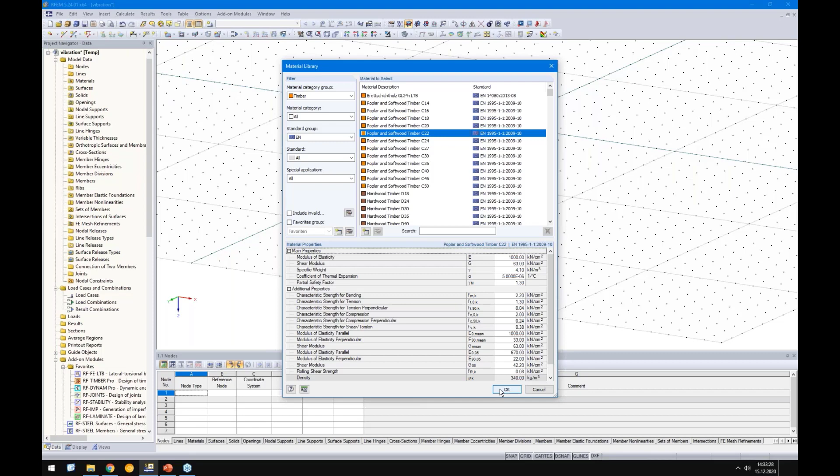Okay, so how do we do this? Let's go back to RFEM, and let's start with the timber. So I will create a new material. Watch out, they have used 10,000 Newton per square millimeter, not 11,000 as C24, but in this case we can simply use a C22, which should have 10,000 Newton per square millimeter. Then I click OK, and the height of the timber is 200 millimeter and the concrete is 100 millimeter. So I will enter 200 millimeter, and of course that's still an orthotropic surface. Otherwise I will get an error message during the analysis.

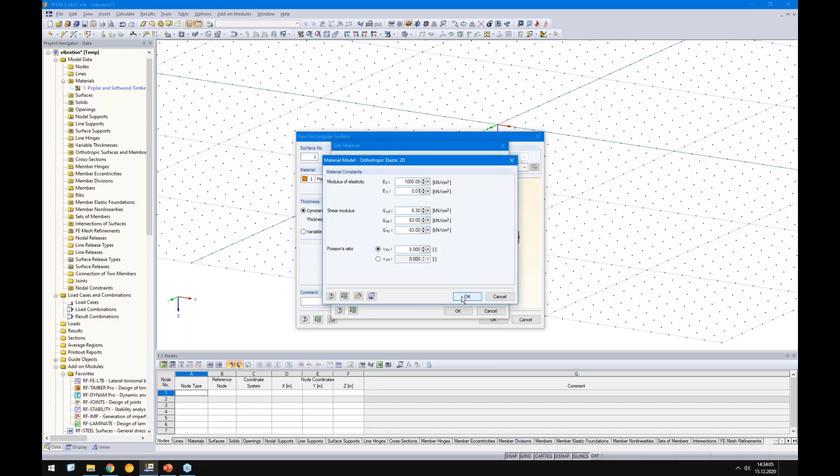And you see here we have the X direction with a strong E modulus and the weak one in Y direction. In this example we can directly set it to 0 because in the hand calculation from the source, no stiffness was considered from timber. There's a tiny stiffness, but of course not much. All right, so it's an orthotropic surface with 200 millimeter. So it has 8 by 12 meters. Let's double check, 12 meters and 8 meters.

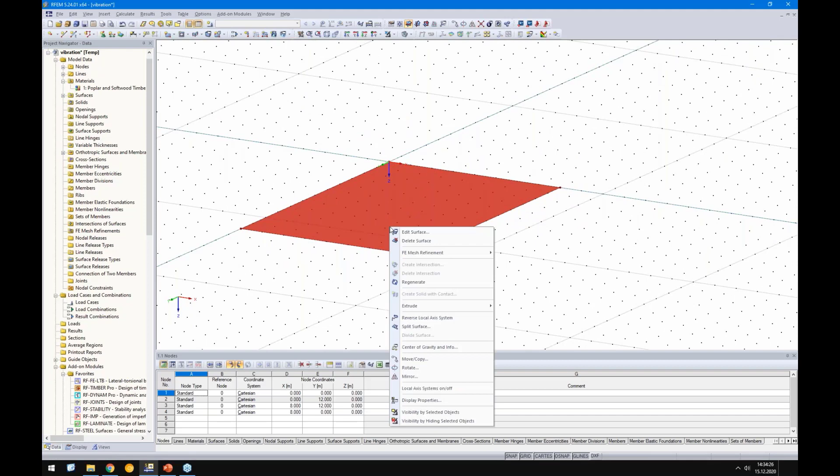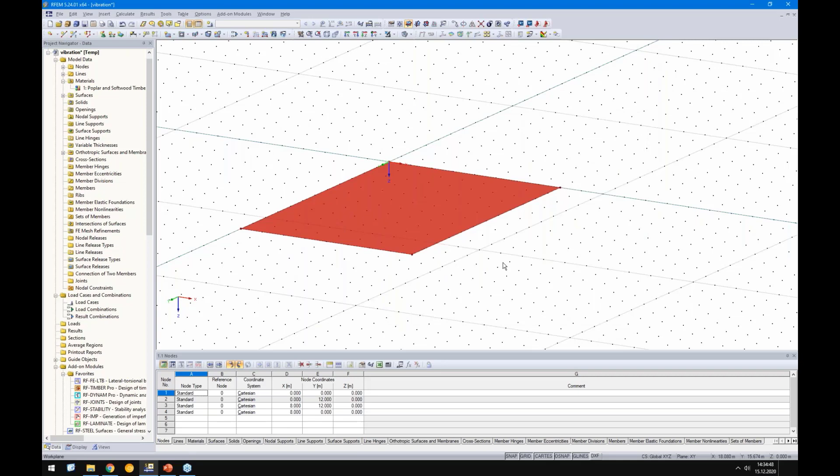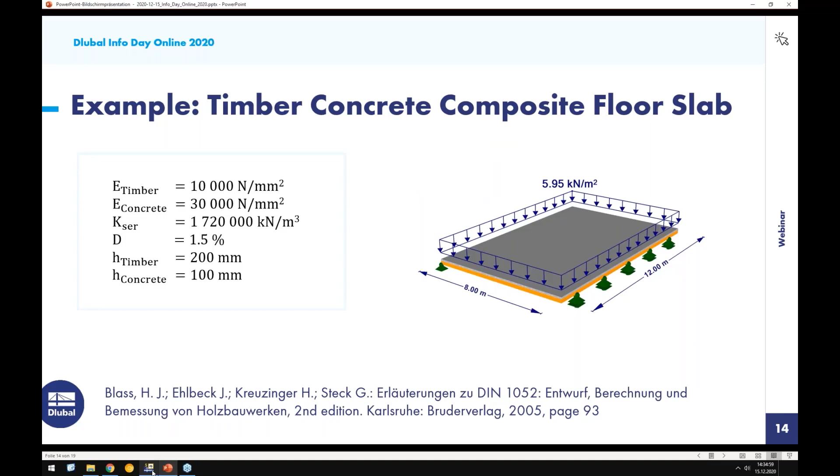Okay, then I will copy this surface and I will create a concrete. So the thickness was 20 centimeters and 10 centimeters, which means we need to lift up this concrete surface by 0.15 from center to center. So we need a new material here. Let's check. They have used 30,000 Newton per square millimeter. So we should use a concrete with about 30,000. It's a C20/25. But it has only 100 millimeter, of course. So we will switch this to 100 millimeter.

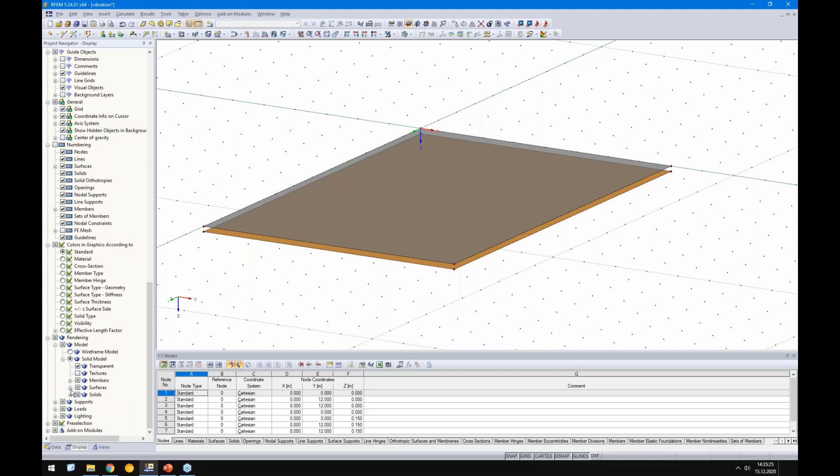And afterwards, let's check if everything is correct. We activate the thickness for the surfaces. And when we zoom in, we see directly, this is the concrete from here till here, and from here till here, the timber, which looks fine. So what we need to do now is connect the concrete slab with the timber slab. And what possibilities we have, I will show on two examples. So we have two ways to do this.

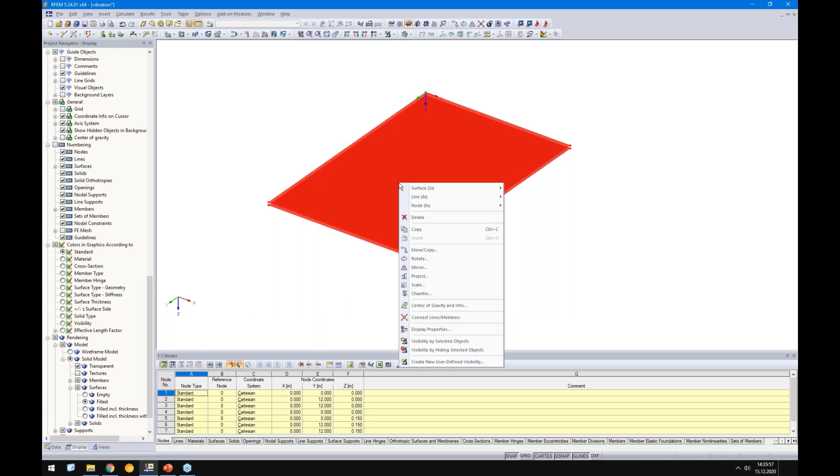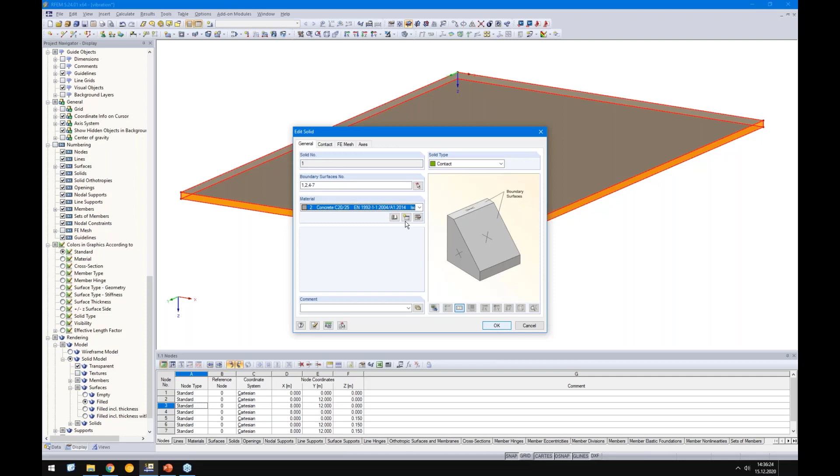The first way, I start with a contact solid. So I select these two surfaces and say create solid with contact. You see directly we get some boundary surfaces. These boundary surfaces have zero stiffness because they get the stiffness from the contact solid. We will define this contact solid. And we select the contact. So these are the contact surfaces, surface 1 and surface 2.

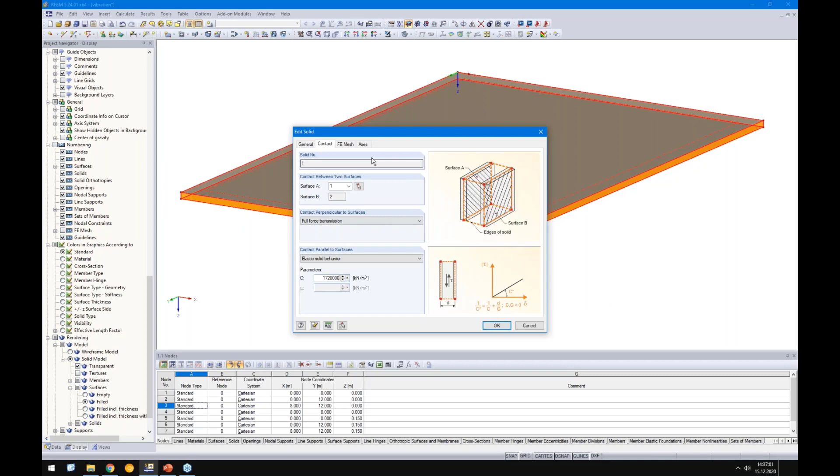Perpendicular to the surface, we want to consider full force transmission, and here parallel to the layers, we want to consider this elastic behavior, and the spring was 1720 meganewton per cubic meter, and this value we will enter here. We are in kilonewton, so I will add 3 zeros. Okay, that's it so far. Let's double check. On top we have this concrete, maybe better to select standard here. And on the bottom side, we should have this timber. Okay, good so far?

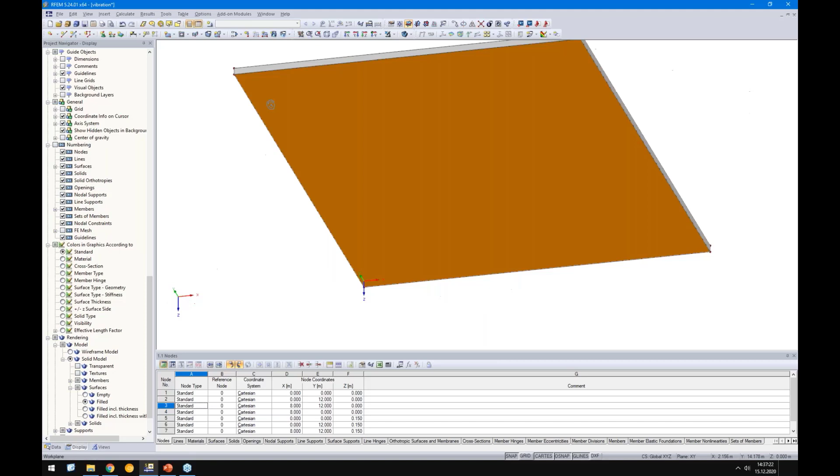Yeah, okay. We will support the slab. Okay, it's simply supported on this side and on this side. In X direction, I will also consider a tiny spring to keep it stable. Otherwise, there is no support in XY plane, and with the springs, I fix this structure, but since we do not use any load in XY plane, we'll use only the mass in Z direction, perpendicular to the surfaces.

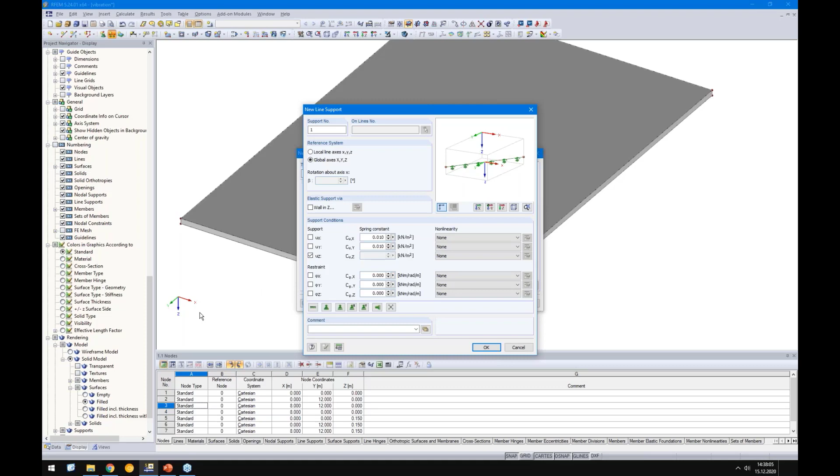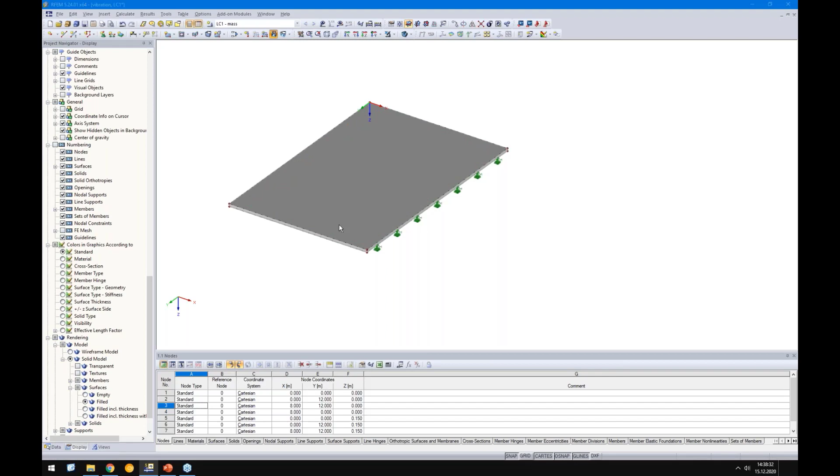Okay. So this line and this line. Okay, I will add a load case. So load case 1, that should be the mass. The self-weight is already included in this 595 kilogram per square meters. So I define here directly the force of 5.95 kilonewton per square meters.

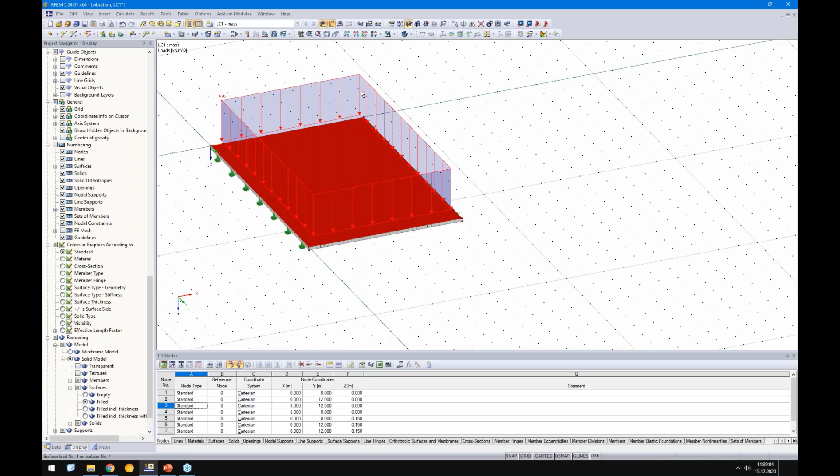And let's take care of the FE mesh size. So maybe we will switch to 0.2 meters, which should be absolutely fine for this example. All right. That's one option. I will show you the second one. For the second one, I will copy the surface via drag and drop.

And in this case, I will use the element surface releases. Okay, I will create a new one, a new surface release. I want to release another surface. So you see here, how does it work? We have one solid or one surface and another solid or another surface. And in between, there should be this hinge information or this release information.

Okay, so here you see we have an advantage because we can control both directions independently. The contact solid, there is only one direction. So X and Y is always the same value. Here we can distinguish, but to compare the results, I will use the same as for the contact solid.

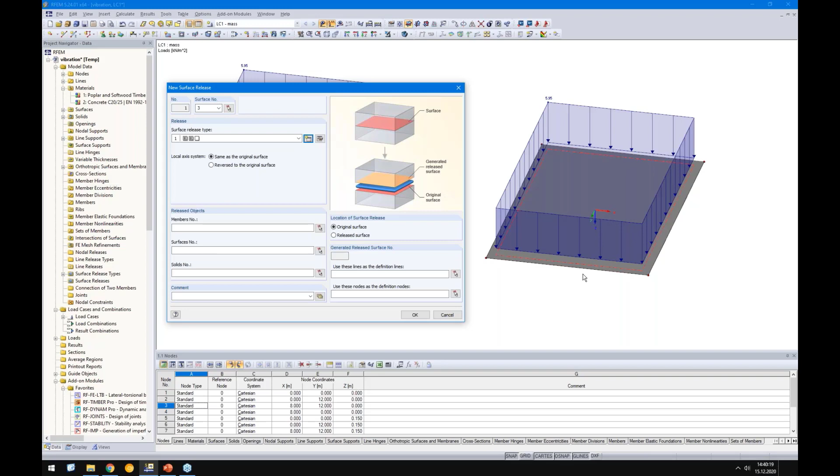Okay, good. And I can release the object here, the same what I did with the line releases, but there is no element until now what I can release, but it doesn't matter. I just click the OK button, and when I click on the surface, you see, there is already a surface. And this surface, I will add it. It's a zero surface, but no big deal.

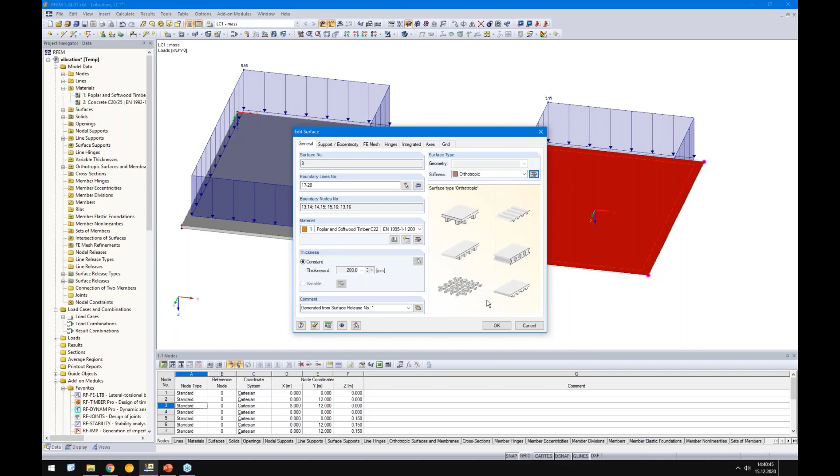I will switch over to orthotropic and I will assign this timber surface. I just need to adjust the thickness of the timber by 200 millimeter. Okay. And now I need to create an eccentricity for this concrete surface by minus 150 millimeters.

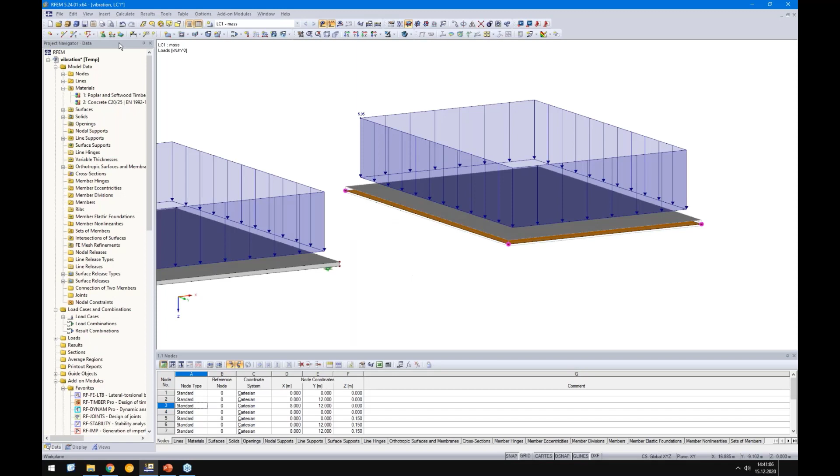Yeah, and now I have the same model. Oh, not the same, I forgot the supports. So on the left side and also on the right side. Okay, so let's run the analysis for load case 1. Meanwhile, we check what is the solution from the analytical equation. From the example, it is 9.5 millimeters.

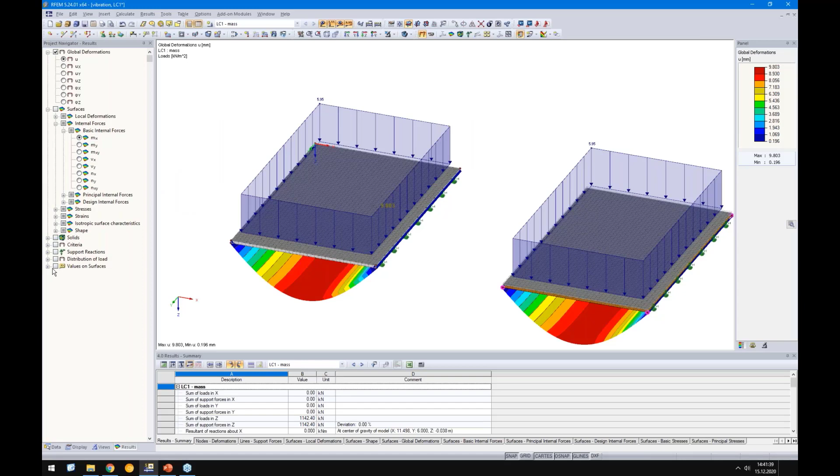Okay, let's go back and see the result. It's good, but it's still a bit away from the 9.5 millimeters. But you can see it here in the center, we have already the 9.5 millimeters, but not here on the outside. It comes because of the concrete and the Poisson effect. Of course, in the hand calculation or in the analytical equations, this Poisson effect is not considered, and therefore I will neglect it here too. I set it to 0.

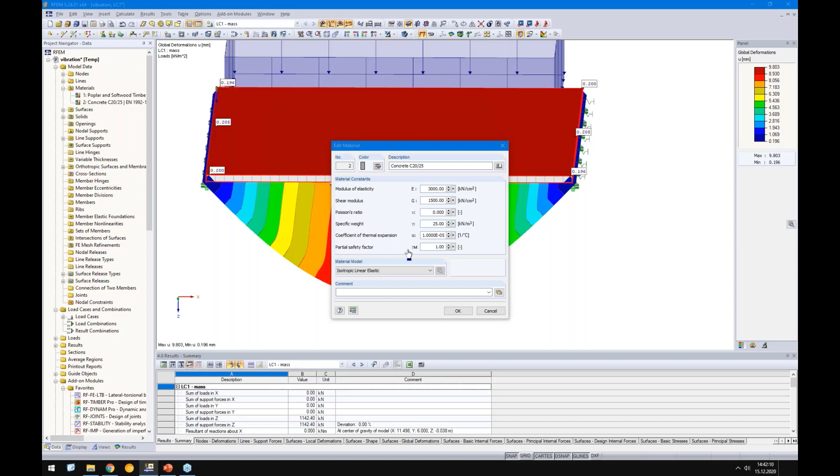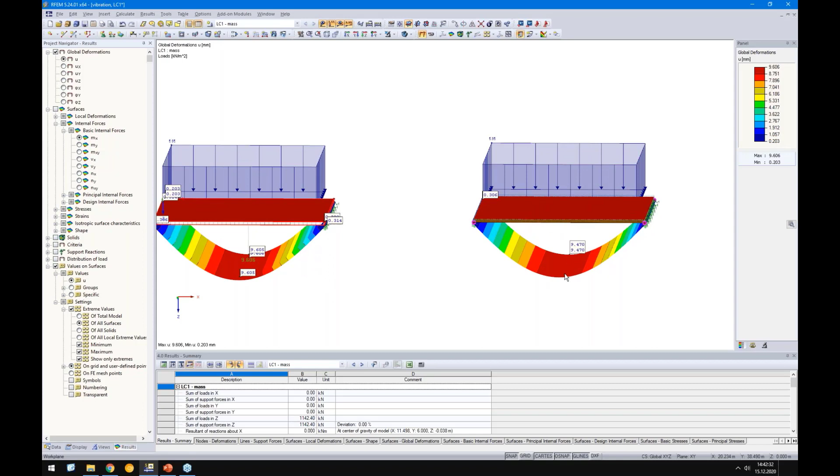Okay, then start again. So we had 9.5 millimeters. We have 9.6 now here, and we have 9.47 on the right side with the surface releases. So it fits perfectly with the result from the analytical equation.

So they write here, okay, it's bigger than 6 millimeter, and therefore the eigenfrequency of this structure is lower than 7.2 hertz. This was the limit in the old German timber code, and the new limit in the Eurocode is 8 hertz. But there is always a relation between the deformation and the eigenfrequency. So I did a small article about this issue.

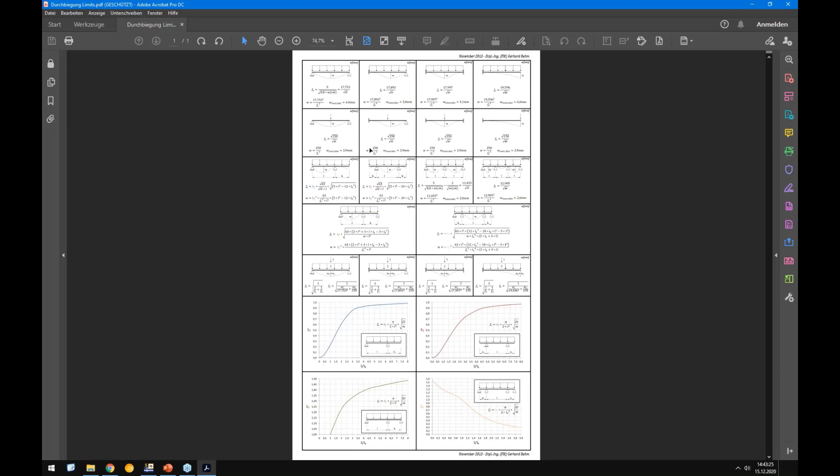It's explained here. When you go to the knowledge base on our website, you will find this information, and inside there is a PDF file that I created a few years ago, 2013 already. And here you can see the relation for a simple one-span beam. The relation is this equation, maybe this is well known from literature.

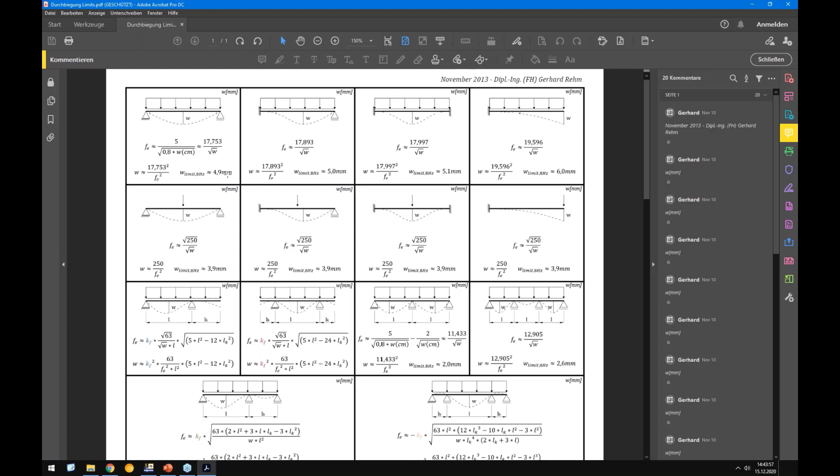So for Eurocode 5 and the limit of 8 hertz, we have around 4.9 millimeter. So if the deformation of this one-span beam is lower than 4.9 millimeter, the eigenfrequency is automatically higher than 8 hertz or 8 hertz exactly. And in case the deformation is bigger than 4.9 millimeter for a one-span beam, the eigenfrequency is smaller than 8 hertz. That's just a simplified rule. Okay, good.

Then let's go further. They prove the natural frequency. So in this case, it should be 5.87 hertz. Okay, it's really low, and they write here some additional design requirements are necessary, the same as in the Eurocode 5, but of course Eurocode 5 does not provide any information when the frequency is lower than 8 hertz. There are some literature and approaches how to deal with it, for example, from this code or from the source I mentioned, or from other literature.

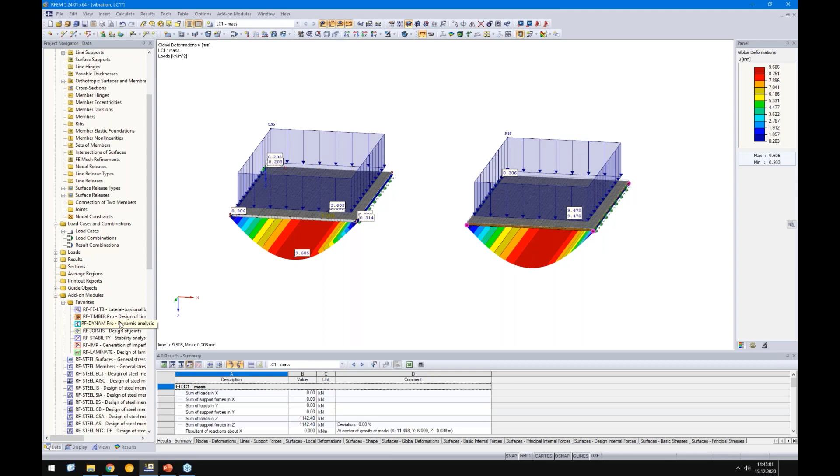Okay, so let's check the eigenfrequency, and we cannot check it directly in RFEM. We need an add-on module called RF-DYNAM Pro. This DYNAM Pro add-on module is for forced vibrations or for equivalent loads, especially for seismic design and so on. In our case, I just want to use this first sub module. There are 4 sub modules inside this global DYNAM Pro module. I use this natural vibration module, and I go here.

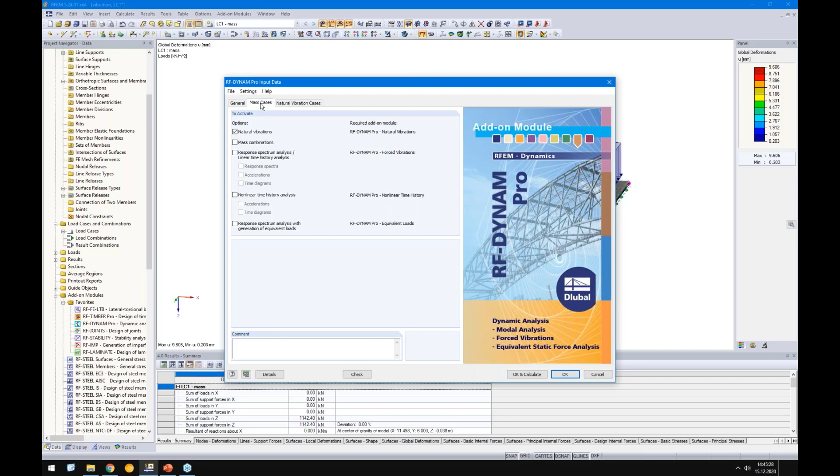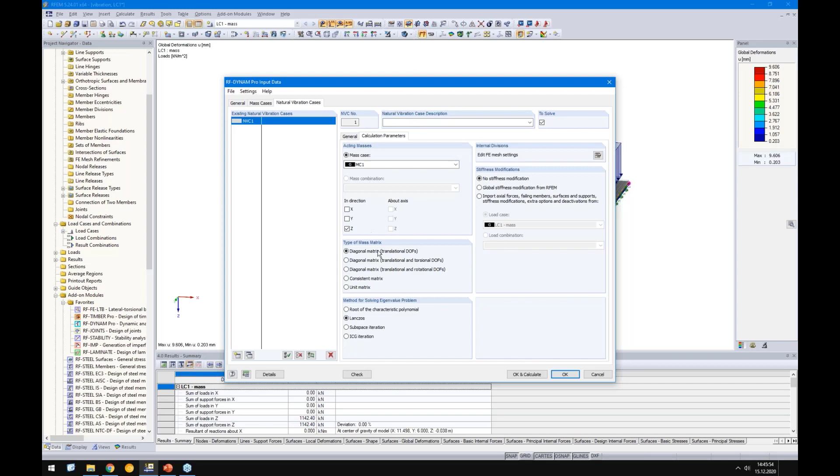I will assign my mass. So in this case, I select use the mass from load case 1. In the next tab, I can select how many eigenvalues I want to calculate. Of course, I'm mostly interested in the first one. And here I say, please do not consider the masses in X and Y direction, since I have no support here. I'm only interested in the Z direction. Okay, then let's calculate the frequency.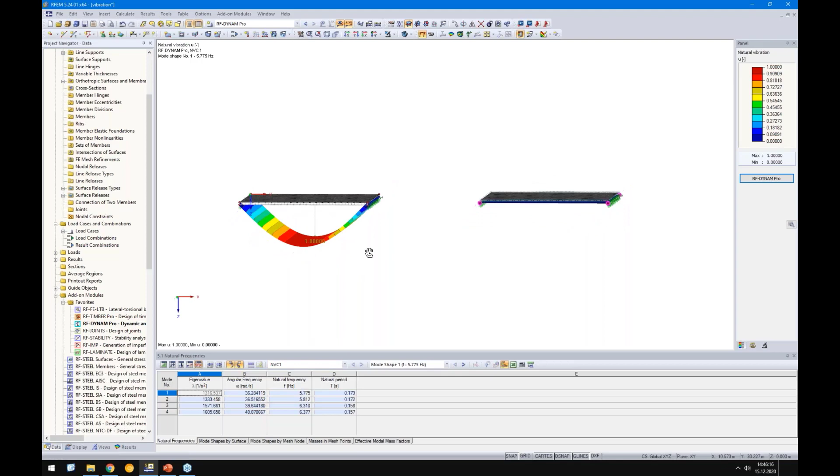Okay, you see the result here on the bottom side, and accordingly the eigenshape. Of course, for a one-span beam, I do not expect anything else. So we can check the second mode, it's on the right side, and you see here the first and second mode. The first mode is on the left side with 5.77 hertz, and on the right side with 5.8 hertz, which is fine, since the approaches of surface releases and contact solids are not exactly the same. Therefore we got different deformations, but they are close enough.

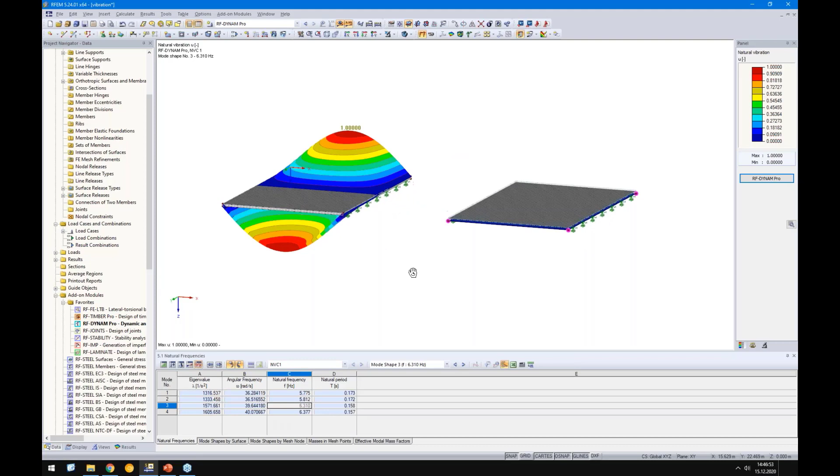For example, the third mode, that's some torsional mode, but I'm not interested in this mode now. I will check this one here. So eigenshape 5.7, let's say 5.8 hertz. And here in this literature, it's 5.87 hertz, which is fine. Then we need to check the stiffness under a man load of 1 kilonewton. It's actually the same as in Eurocode 5.

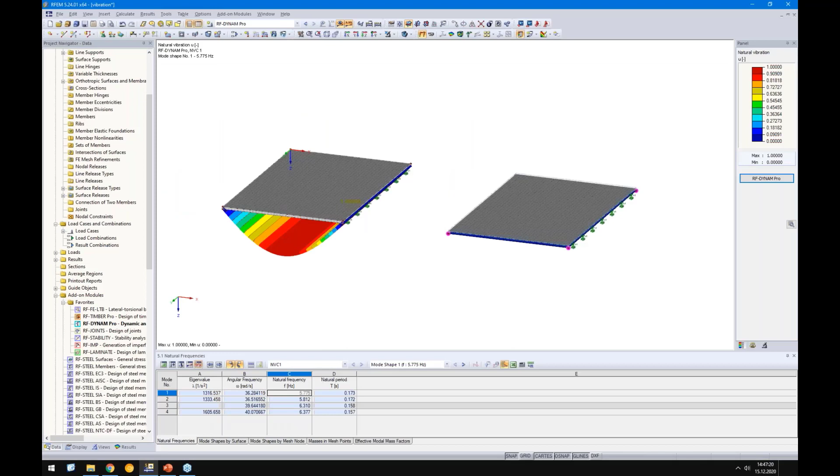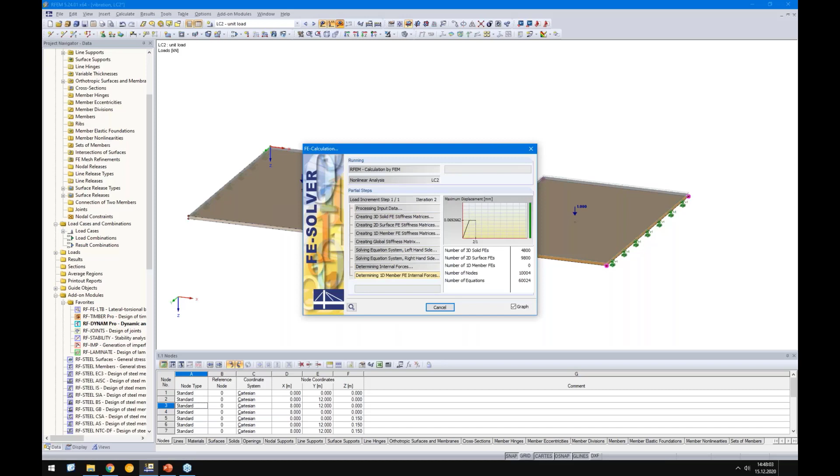We will do this. So I will create a new load case, and I call it unit load. And I will apply this load exactly in the middle. And the same here. And I add this 1 kilonewton on this generated node. All right. So we run the analysis. And we see a deformation of around 0.07 millimeters. Compared to the literature, it's a bit smaller.

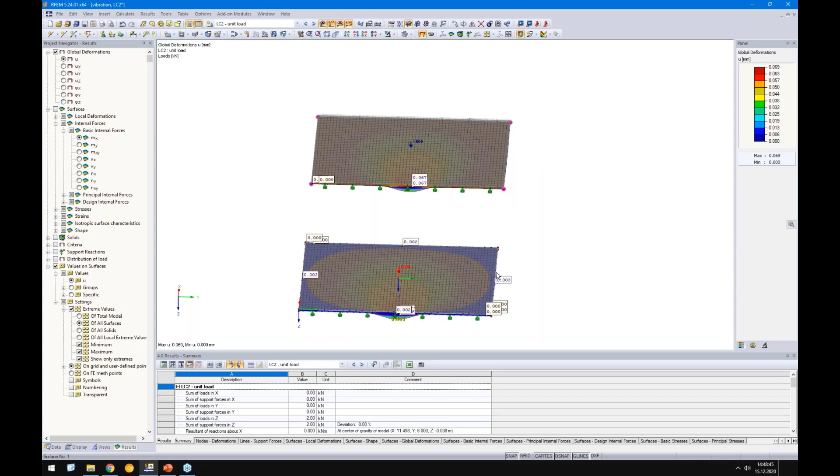The reason is because they calculate the stiffness of this floor with an effective width. They do not consider the whole width of 12 meters. The effective width was, I guess, 3.8 meters in this example. So if you would reduce the width of the floor to 3.8 meters and distribute the node load to a line load, you will get exactly the 0.083 millimeters. So in this case, it is a bit too uneconomic, but it's not far away, so it's okay.

Okay, and the next step was the acceleration design. Because our frequency is smaller than 8 hertz, we need to check the acceleration.

Empirical investigations in the 80s offered the result that vibrations with frequency lower than 8 hertz are dependent on the acceleration, and with higher than 8 hertz, they're dependent on the velocity. In this case, we are smaller than 8 hertz, so we will check the acceleration.

So there are tests showing that this velocity check, which is done in the Eurocode, actually is not really design-governing anymore, because a typical timber floor, for acoustic reasons, is already really heavy, and the weight is really high. So therefore, the velocity check is mostly never controlling and not important. But okay, the acceleration needs to be checked.

Let's check how we do it by hand calculations or by some analytical equations. Maybe you know these equations already, or you have seen them in some literature. So we have the acceleration A, and we have a force divided by some mass. So this is the force here, and this is the mass, and this 2 times D. D is the damping. This comes from the magnification function.

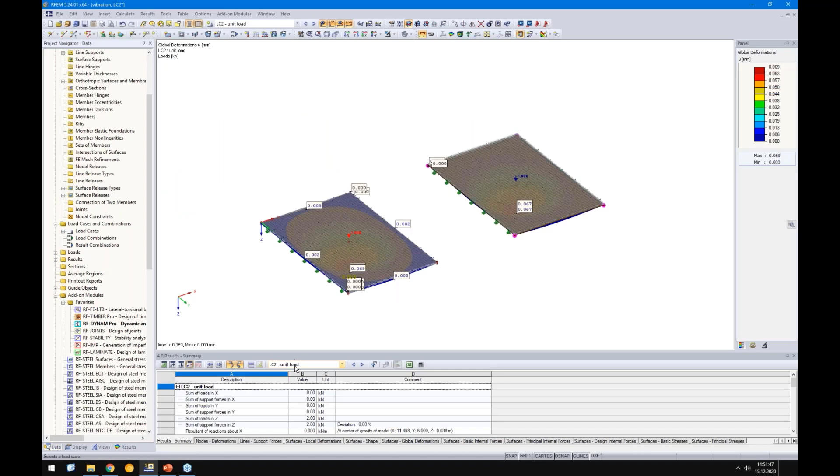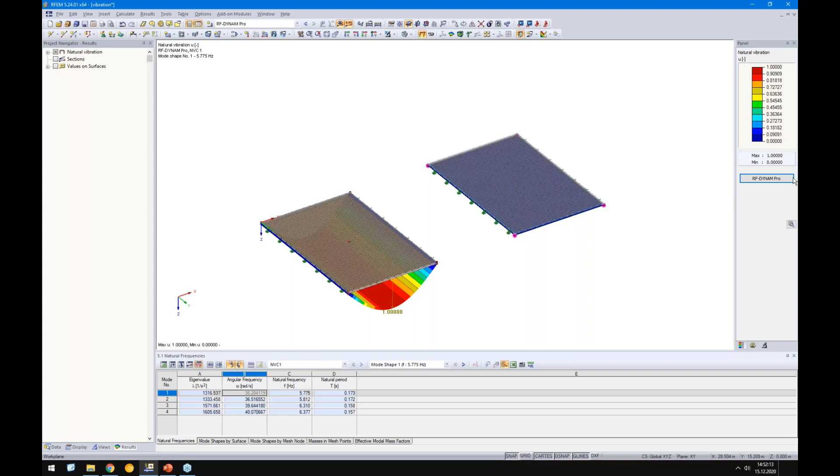All right, before we go back, maybe we can switch to RF-DYNAM Pro. No, we cannot. We need to restart the analysis again because I want to copy the natural frequency, because I need it in the module. In this case, I need the angular frequency, omega. So I copy the first one. And then let's go to RF-DYNAM Pro.

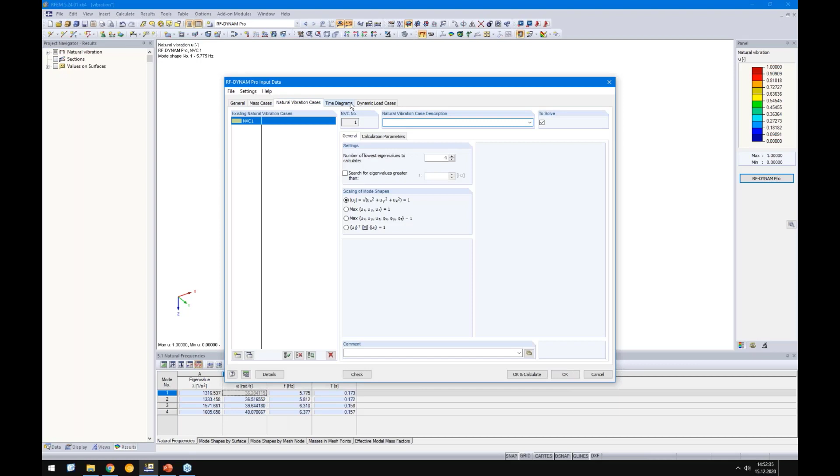So in this case, I need to activate this response spectrum analysis option, or in this case, it's actually a time history analysis with a time diagram. So I can skip the first 2 tabs because they are not important for it. And here I need to define this function, and I copied already this omega, and this omega I have to enter here. So this is actually a resonance check.

So do not enter the angular frequency of a person. When you walk around, you walk with around 2 to 2.45 hertz, and 2 times pi by the frequency is the angular frequency, but do not use the angular frequency from the person. That's why it's called resonance check: you need to enter exactly the angular frequency from the first eigenshape to get the resonance. Okay, the shift should be 0, and multiplier I write down just 1 for now, and you see this periodic function, which is fine.

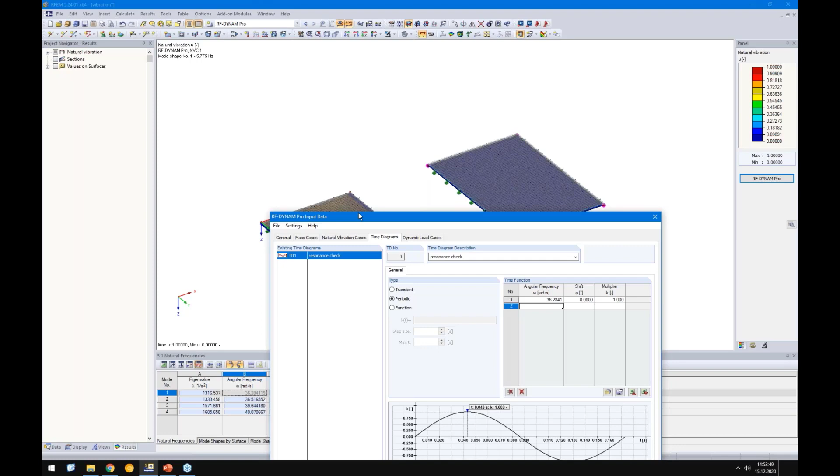But we need to consider the correct force. We remember in load case 2, I have defined this unit load of 1 kilonewton. So when we check the force here on the upper side, we have 0.1 by 700 multiplied by 0.4, which equals a factor of 0.028. Let me double check this in my notes. Yes, it's correct. Okay, so when we multiply this factor by this 1 kilonewton, we get exactly the same force as it's written here. And that's actually all for this tab.

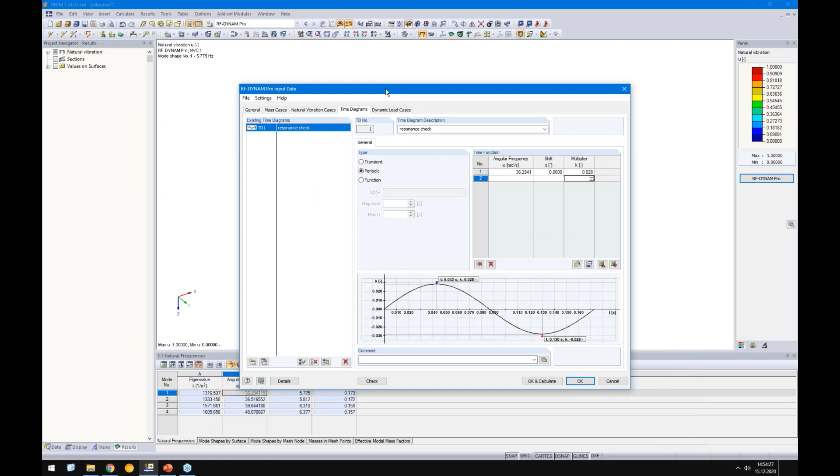Then we switch over to the dynamic load case. We will do a linear modal analysis. And here I can connect this unit load, this 1 kilonewton, with this time diagram. Okay, I can use this factor here too and use a factor of 1 here. That's also possible. But it's okay now.

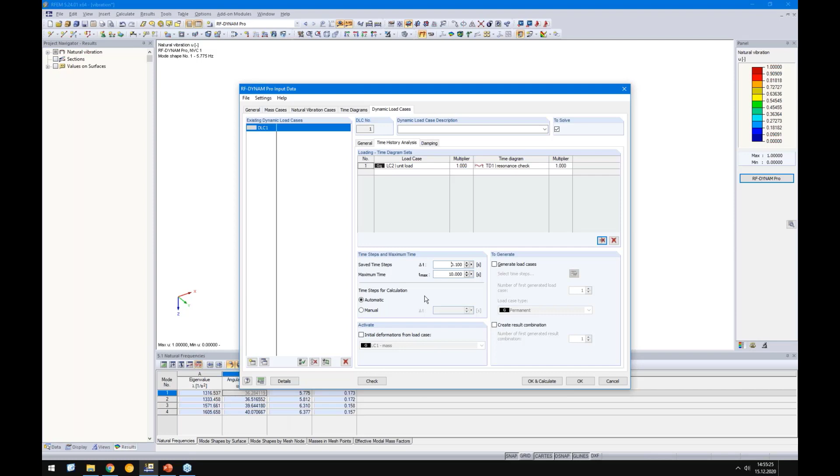Okay, very important are the time steps. They should be small enough to cover all important time steps, and long enough to cover the resonance. So you need to play around with it a bit. Start with one value and then see in the results if resonance occurs already or not. Okay, and at last we need to define the damping, and it was given by 0.015. I guess that's all.

Okay, I need the calculate button, let's check what result we get. We get 0.064 meters per square second. So, 64.

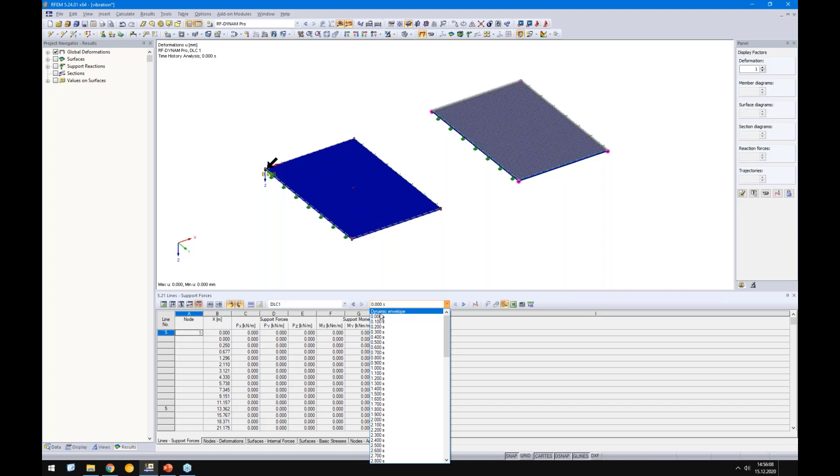Now we get the result from the dynamic load case. Here we get the result from each time step till 10 seconds. But I'm interested in this dynamic envelope, which considers all of these time steps. Okay, and here I will switch to nodes accelerations.

So we know this node is number 17 and this node is number 18. Okay, so in this example, we get 0. It's not exactly the same, but it is okay. We get 0.032 when we compare it with the result from the analytical equation. We get only 50% of it, exactly 50%.

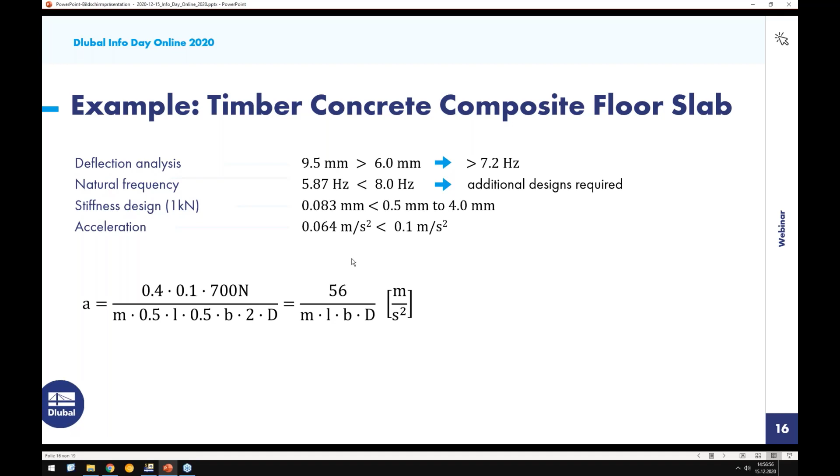When we think about this equation here on the bottom, what they have used in this example, they think about a 4-sided supported slab. As you see, they estimate only half of it goes into this support and half into this support. So what we need for our example is actually this one, because we use it as a one-span beam. They have mixed it in this literature a bit.

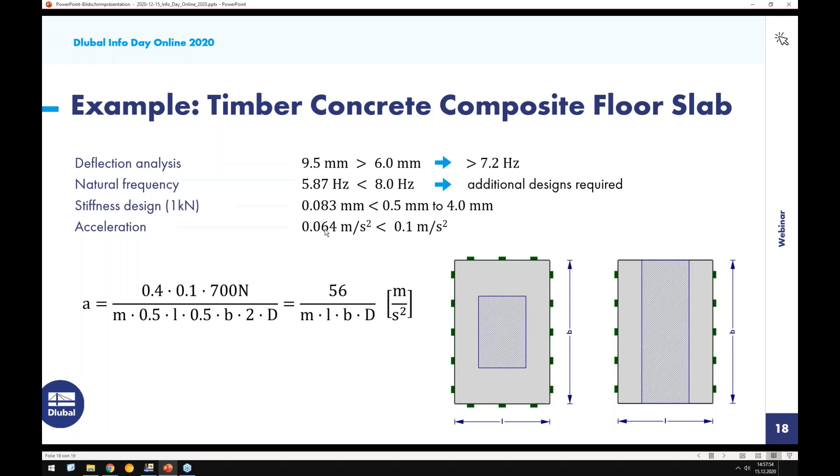It was a bit confusing at first, but I figured this out at the end. If you reduce, this is 0.5 by b. So if you neglect the 0.5 by multiplying the whole equation with 0.5, you multiply this value also with 0.5. So you will get exactly 0.032 meters per square second. So this is the way to check it.

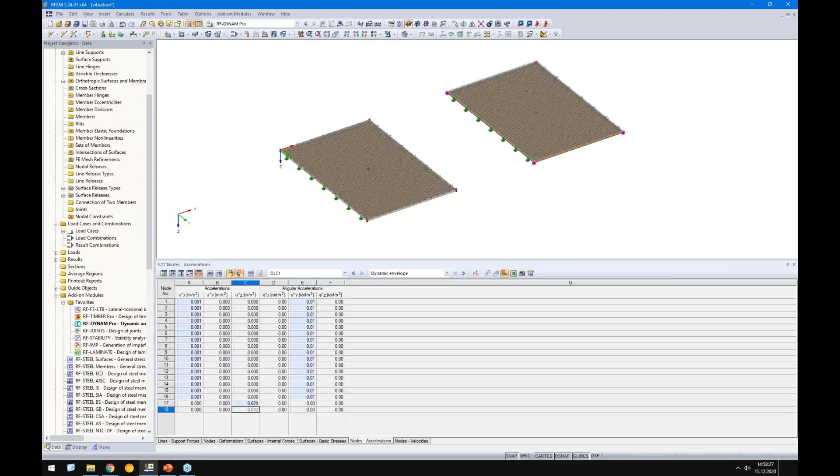And of course, you can add the supports here and here, so support it on 4 sides and run the analysis, copy the angular frequency again, insert it in the time course monitor, and then you will get exactly this 0.065 meters per square second. But this is your homework, and for me, that's all from today.

I hope everything was clear with this approach and with defining the contact solids and the surface releases. It's a mighty feature. Of course, for this slab, maybe I would not use this RF-DYNAM Pro add-on module when there are some easy, simple analytical equations where you are much quicker.

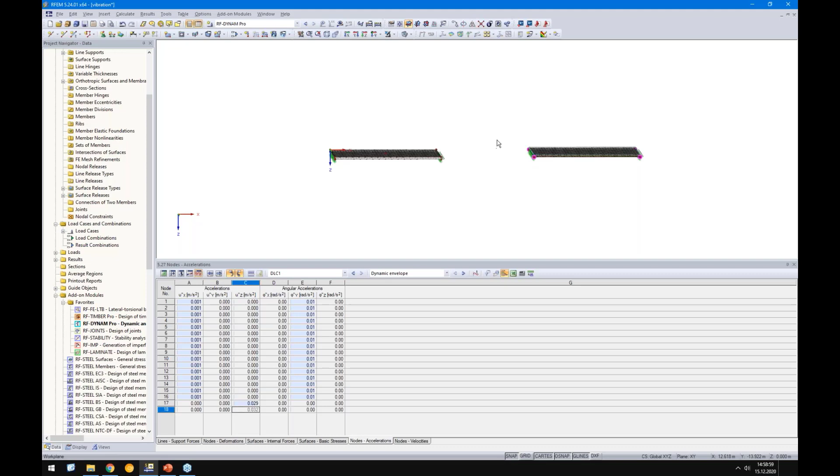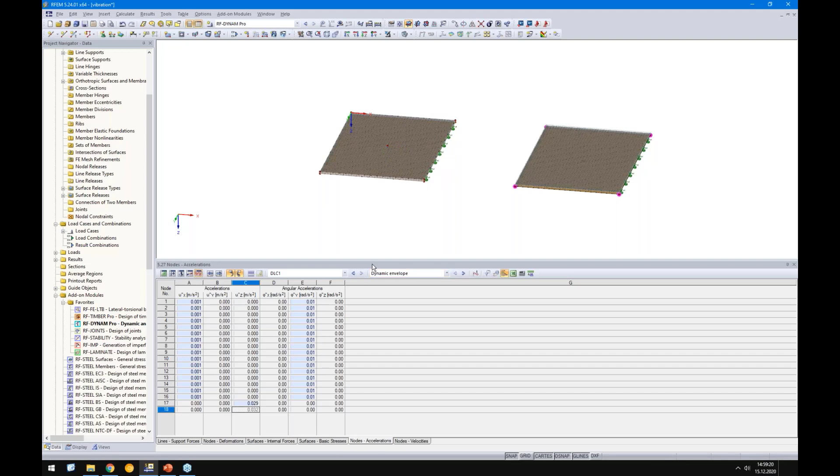But in case of some complicated structure, or please consider you have a downstand beam here, so you have no rigid support, you have a semi-rigid support, and then it's getting really complicated to get these accelerations with analytical equations. Maybe one thing I want to show you is here, this time course monitor.

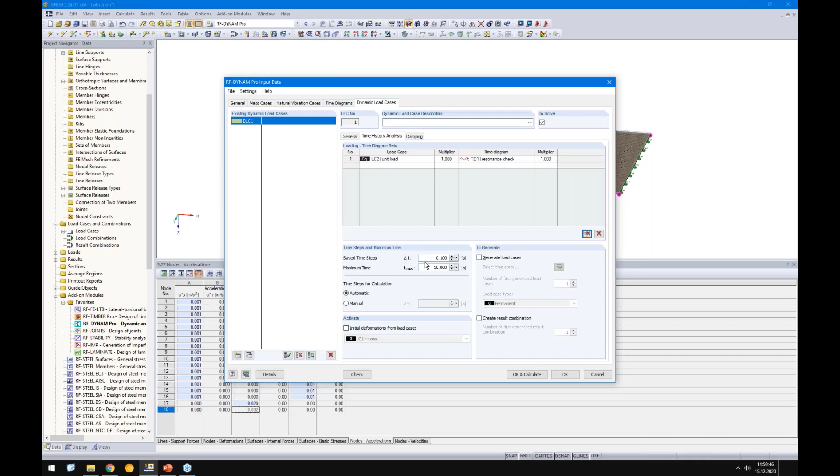I want to check the acceleration in Z direction for node number 18. Okay, maybe you see here, maybe the time step was not small enough. Maybe we should add here another 0. I will do this quickly to get a proper result.

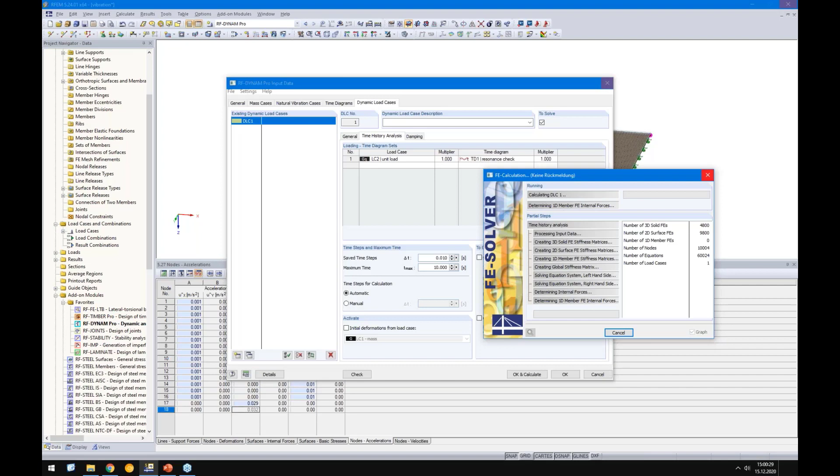We saw that the function was not really homogeneous, there were a lot of peaks and so on. I increase the increments here, and then let's check. Of course, the more time steps you use, the longer the analysis takes, but we'll see the result.

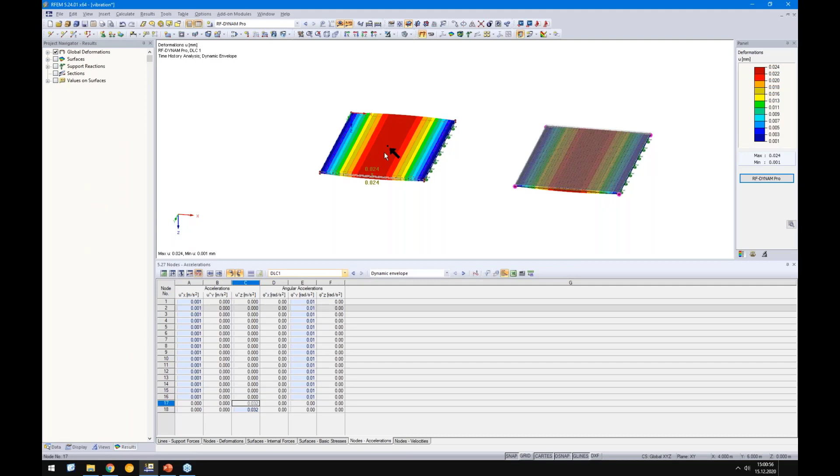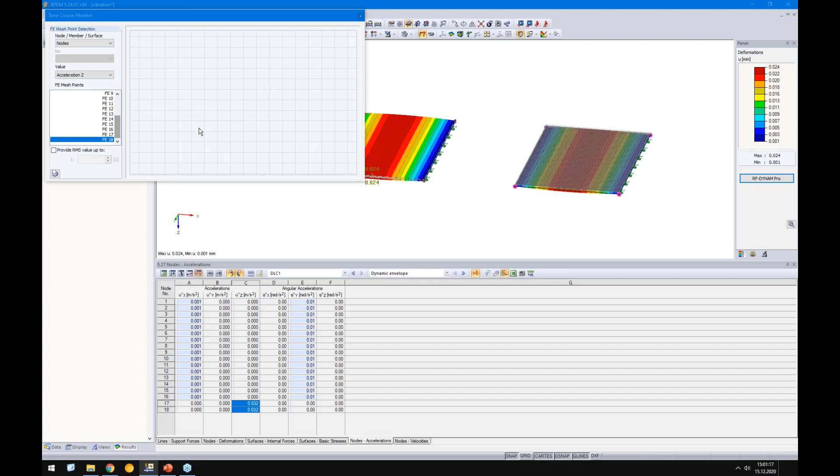Okay, so you see it was the same result. It does not change, only for the contact solid. Now we get the same results for both because of smaller time steps. And when we check this time course monitor, hopefully we get a better curve. Looks good so far.

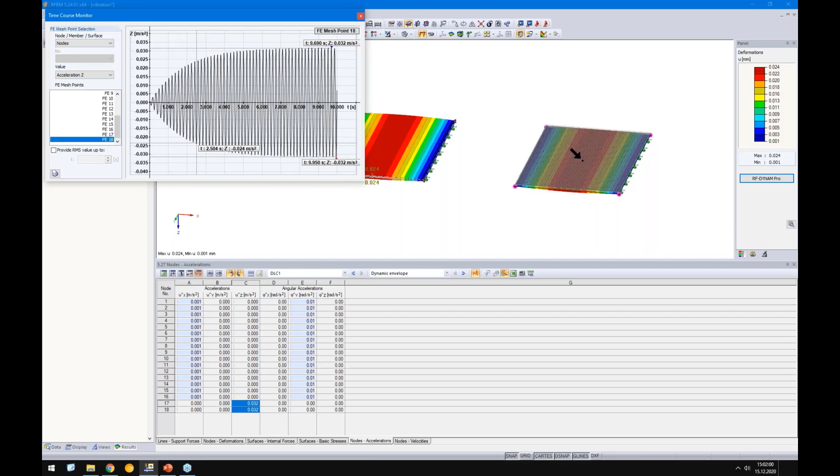Okay, so you can evaluate all the results from velocity, from acceleration inside here, this time course monitor. Okay, good, so that was it from my side. And I will give back to Andreas, thank you very much.